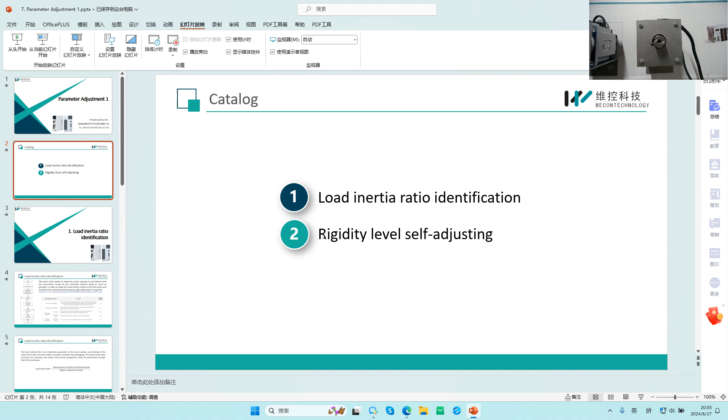Okay, let's start. Today our content is about parameter adjustment, part 1. For this parameter adjustment function, we have two parts. The other part I will introduce in another class. This is today's content: part 1 is load inertia ratio identification, and part 2 is rigidity level self-adjusting.

Okay, first part. First of all, we need to know why we need to set the load inertia ratio. Because we need our servo to have a good control effect on our motor. What's a good control effect? For example,

this is our speed instruction sent by our driver, but in fact our motor speed may be like this one. We can see there will be a delay and also some overshoot of our actual speed. So our target is to make these delays and these overshoots as small as possible. This is our target.

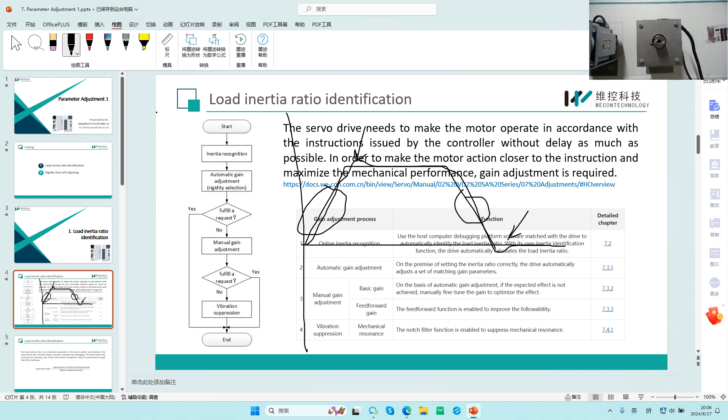So we need to set the control parameters of our driver. And before setting the control parameters, we need to set a suitable load inertia for our driver. On the left part, we can see the steps to set the control parameters. First, we need to set the inertia ratio. And second, we can use our software's automatic gain adjustment function to get a recommended rigidity level for our driver.

Usually, for most applications, after these two steps we can get good control parameters for our system, so we can use them directly. But sometimes the control effect may not be good enough, so we can continue to use manual gain adjustment to set the control parameters manually. And if the control effect is still not good, then we need to adjust the vibration suppression. Yes, these are the steps. Today our training will introduce this part first.

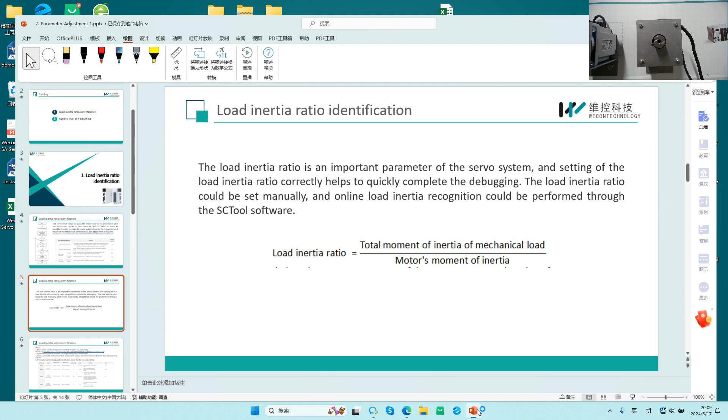Here, what's the load inertia ratio? This value is the total moment of inertia of our machinery load divided by the motor's moment of inertia. For this value, we have two ways to get it. The first way is to use the SC tool; the SC tool uses this debug function to get the load inertia. The second way is to use the monitoring value, U0-20. We can start the machine, run it, and read this U0-20 value. After we get the inertia ratio, we need to set it in parameter P3-01.

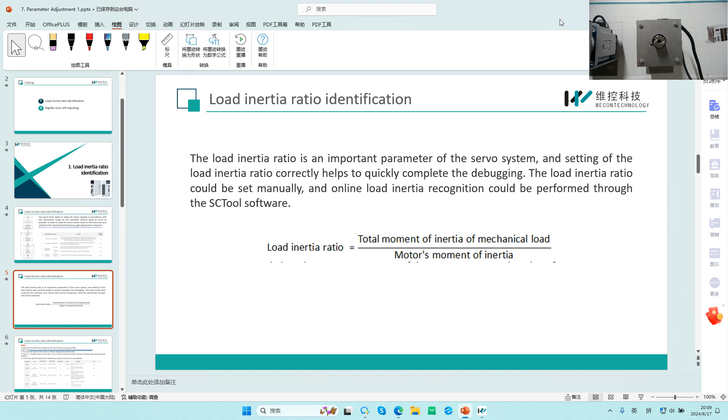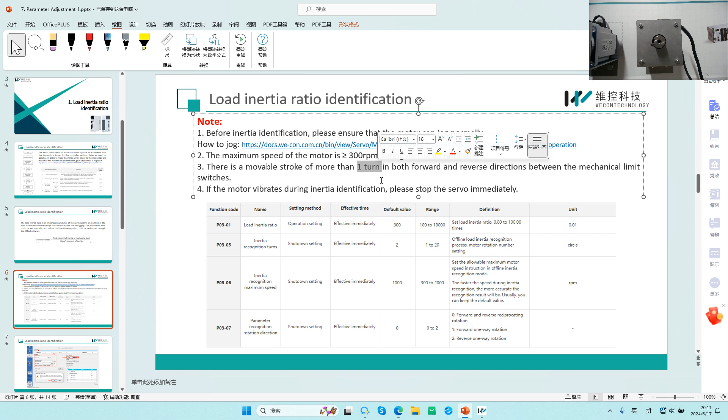Step 3 is the movable distance of our motor. We need to ensure in both forward and reverse directions our motor can move more than 1 turn, so there should be enough distance for our motor to rotate to get the load inertia ratio. And at last, if something goes wrong, for example the motor begins to shake, then we need to stop the servo immediately to ensure the machine is safe.

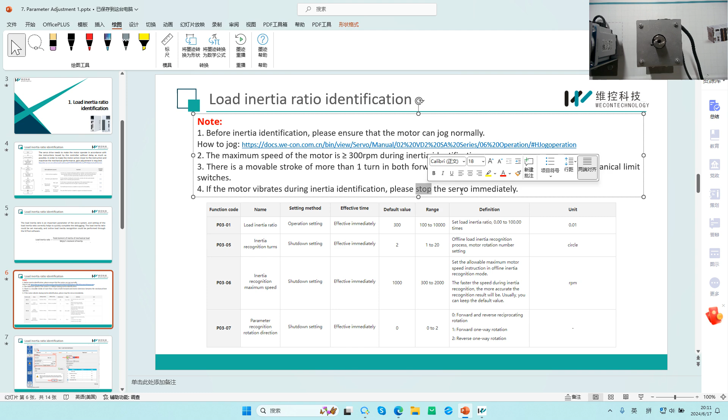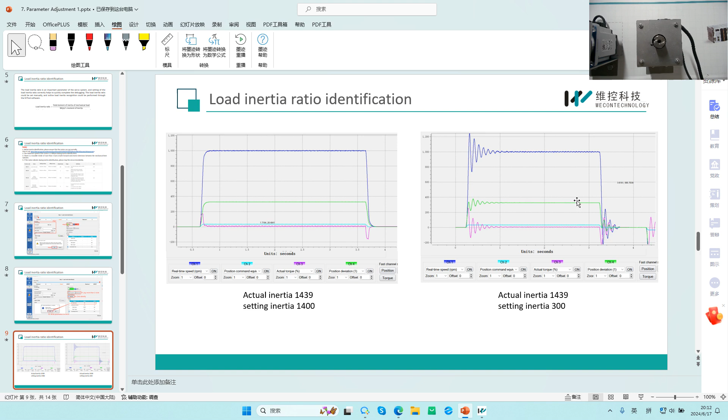But on the other side, we can see because the set inertia is too small, the motor will begin to shake when it reaches the high speed, and also when it slows down to 0. Yeah, in these 2 parts, the motor will shake. Okay, so now let's connect our servo.

Connect our driver first, and in the debugging page, this is the jog speed, and this is the running speed. We can set a small one to make it clear, and click on. Now we can click forward and reverse to make our motor rotate. And now we can click this identify button to run the motor.

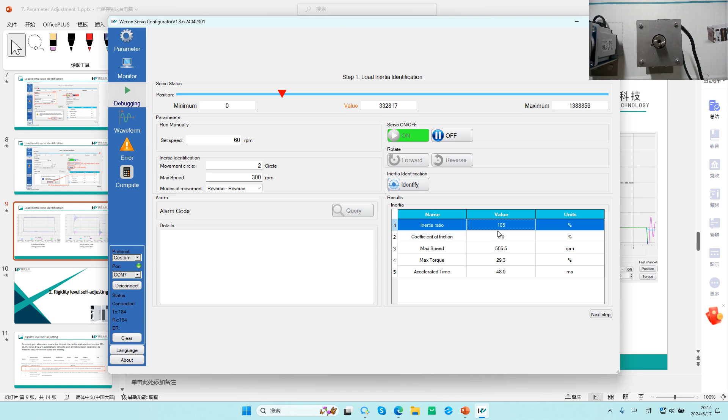Okay. This is 96, it's similar to 1. Also reverse and reverse. The only difference is the motor rotation direction. Okay. So the inertia ratio is also around 1, because in fact there is no load connected to our motor, so this value should be around 1. So this is the first part about how to use the SC tool to get the load inertia ratio automatically.

And the second part is rigidity level self-adjusting. For this parameter, P3-03, here we have 2 settings. 0 means the control parameters will follow the rigidity level we set. Where are the control parameters? They are in group 2. You can see here we have the first position loop gain and the first speed loop gain, and some other control parameters.

So here, if we set P3-03 as 0, it means there will be a table, and in the table, for different rigidity levels, we have different control parameters. And all the control parameters will depend on the level we set. Second, if we set P3-03 as 1, it means the control parameters will not depend on the rigidity level of our motor. They will depend on what we set here. Okay, that's the difference.

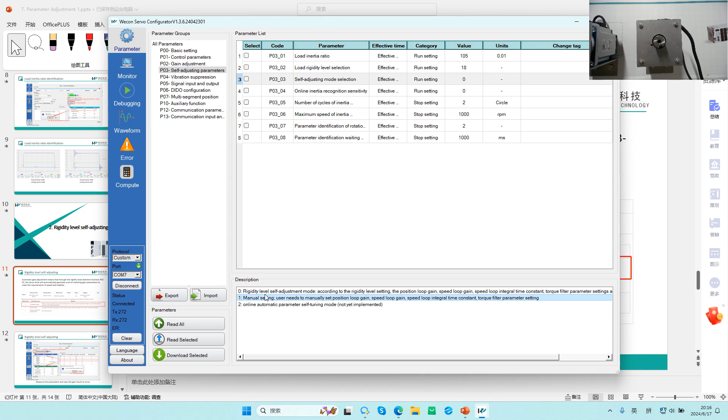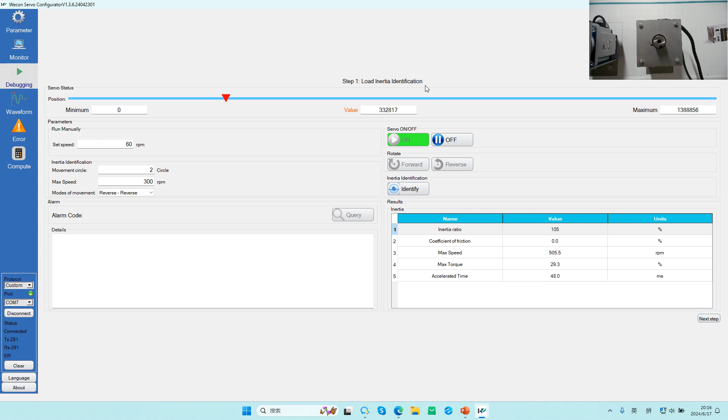And usually if we use manual setting, we need to set this parameter as 1. And now here are the steps for how to get the rigidity level with our SC tool, and we can also use the SC tool to show it. Here, after we finish the load inertia identification, we click next step, and here we click this button. Then you can see the motor will begin to rotate again.

And in this table, we can see the control effects under the different levels. Finally, the SC tool recommends we use level 18, because we can see in this table 18 or 19, these two have a better control effect. So the system recommends this rigidity level. And in this table, we can see some recommended control parameters given by the SC tool.

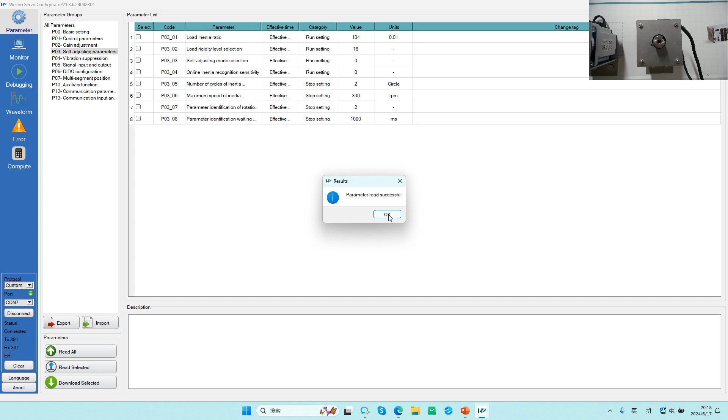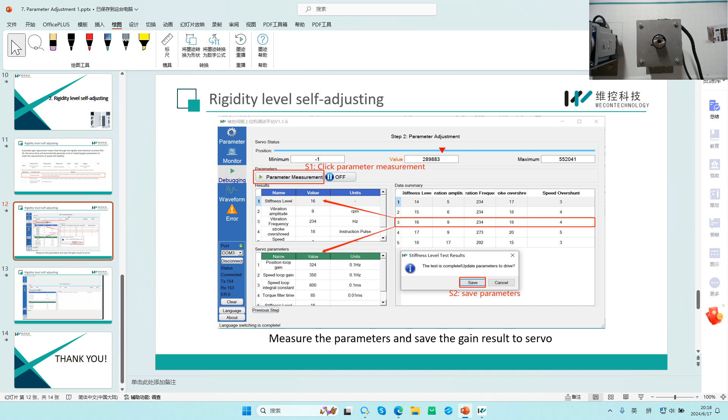And then we can see here in group 2, these parameters, 406, 350, 120, 35, are the values we get from here. Okay, those are the steps for how to get the rigidity level of our motor.

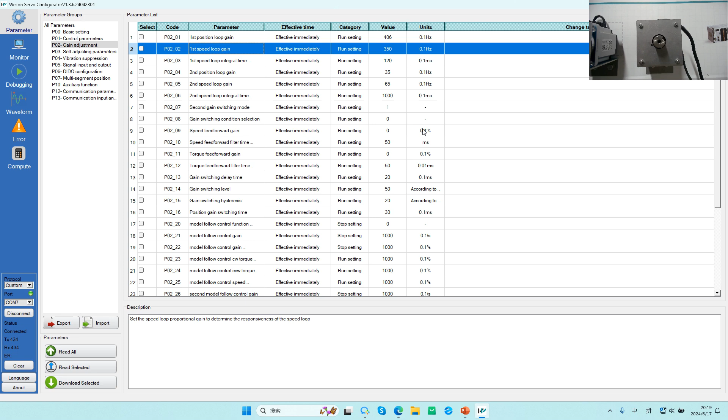And in another class, I will introduce how to set these control parameters manually. For example, if we increase this parameter, how the control effect will change. And also, for example, if we reduce this parameter, how the control curve will change. I will introduce this content in another class in the future.